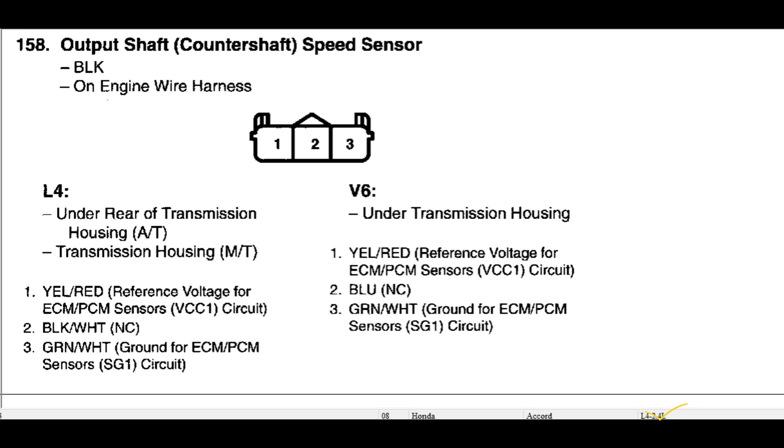2008 Honda Accord with a 2.4 liter, also applies for the V6, same years 2008 to 2012. The color of the wires are a little different for the V6 and the 2.4 liter. I'm going to be troubleshooting a 2.4 liter that has this code.

P0717, a problem in the input shaft, main shaft, speed sensor circuit, no signal. You have to read this carefully. I'm not going to be reading too much, I'm going to be providing some very brief explanation.

This is the code I have here, and basically what you're going to be doing first is jump this line, SCS. Now I gotta say something, this is personal. I have never jumped this line and I have never had any problem before. The idea of jumping this line is to be safe and not damage the computer before disconnecting any other connectors of the PCM.

Personally, I haven't done it, and I have done so many jobs in Hondas. So far I have not damaged anything, but I'm not saying you to do it that way. Please jump it, because that's what Honda says.

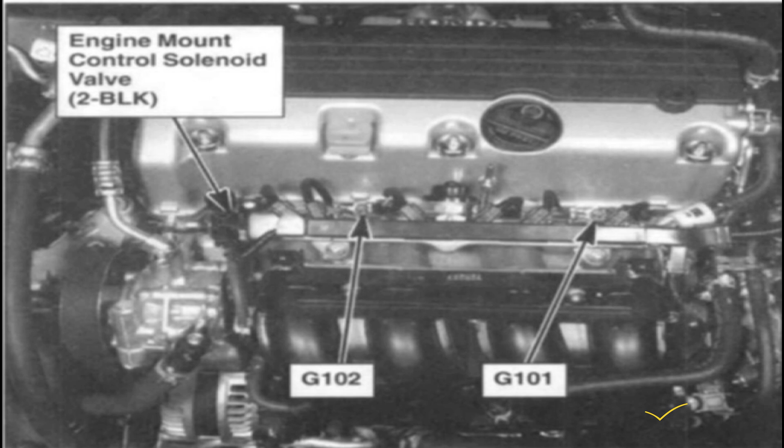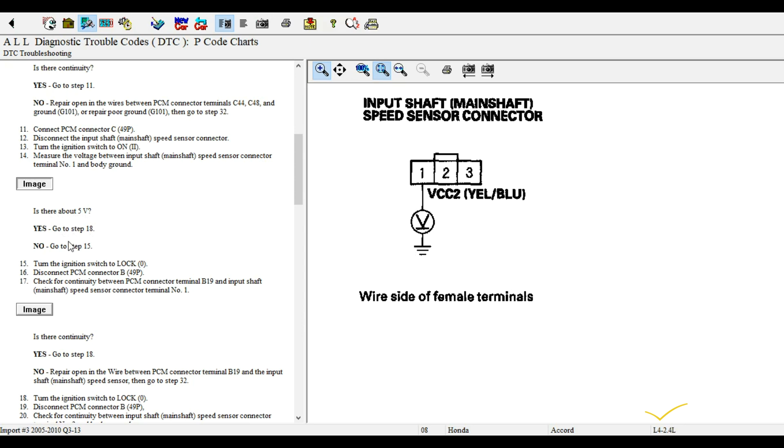You're supposed to get about 5 volts here. Is there about 5 volts? If yes, go to step 18. If not, go to step 15. It all depends on what you get. It's the same connector on the PCM.

49P. Turn the ignition switch to lock position. Disconnect PCM connector B49. Connector B is this one here, the same 49 connector B.

Check for continuity between PCM connector terminal B19, which is this one here, 19 right there. I wish I could make this bigger, but the software is not allowing me to do it. Sometimes I can make it bigger so you have better visibility. Terminal B19 and input shaft, main shaft speed sensor connector terminal number 1 here.

So you gotta check continuity, and if you find continuity, go to step 18. If not, you have to repair the wires. Disconnect PCM connector B49P again. Check for continuity between input shaft main shaft speed sensor connector terminal 2 and body ground, this one here, terminal 2 and body ground.

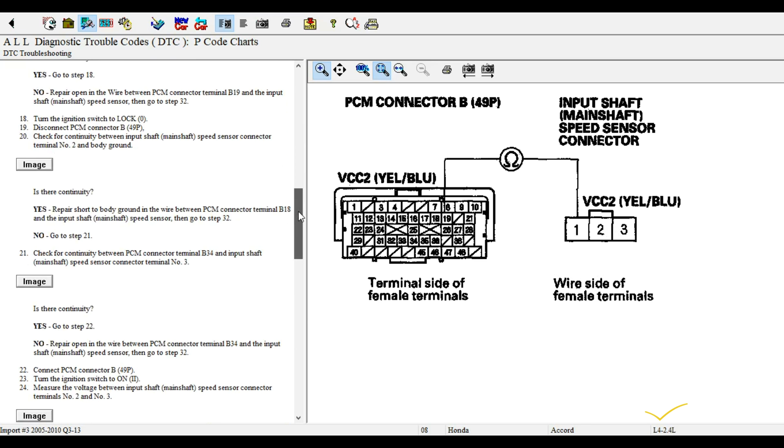That is the next step to do, and here it is. If you have continuity here, then you have to repair the short to body ground in the wire between PCM connector terminal B18 and the input shaft main shaft speed sensor, then go to step 32. If not, go to step 21.

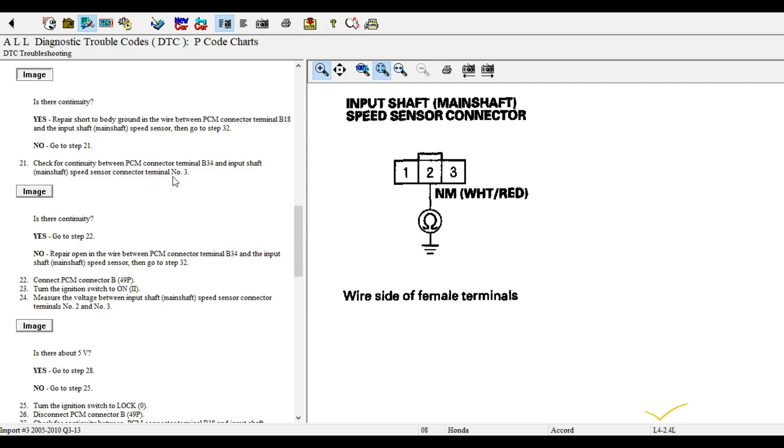Check for continuity between PCM connector terminal B34 and input shaft main shaft speed sensor connector terminal 3, which is this one here. If there's continuity, go to step 22. If not, repair the wire harness between PCM connector terminal B34 and the input shaft main shaft speed sensor, then go to step 32. It depends on what you get.

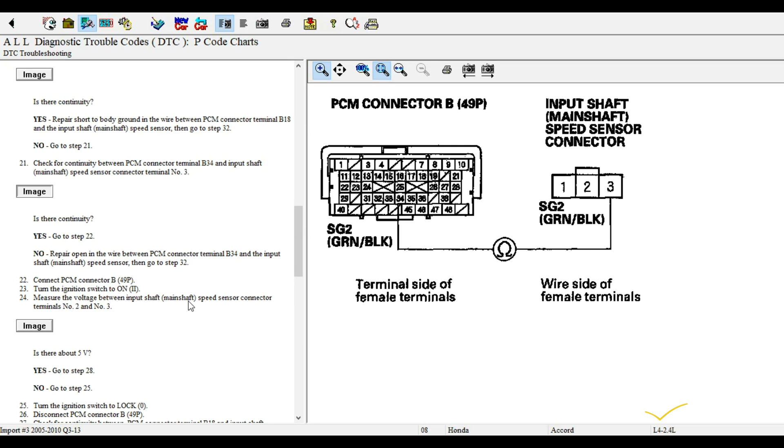Connect the PCM connector B49P again. Turn the ignition switch to on. Measure the voltage between input shaft main shaft speed sensor connector terminal number 2 and number 3. Here is the image again, and also the color of the wires are there, so no way to get lost.

So you have to turn the ignition switch on to do this. Measure the voltage between input shaft main shaft speed sensor connector terminal number 2 and number 3. Is there 5 volts? Supposed to get 5 volts. If you don't get 5 volts, go to step 25, if not to 28. Yes, to 28. Turn the ignition switch to lock.

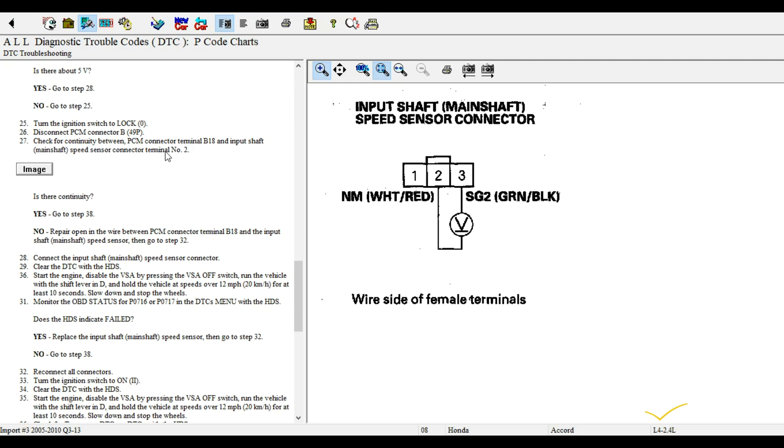Disconnect PCM connector B49P again. Check for continuity between PCM connector terminal B18 and input shaft main shaft speed sensor connector terminal number 2. And here we go again, this is terminal number 2. Let's check for continuity between PCM connector terminal B18, which is this one here, 18, and input shaft main shaft speed sensor connector terminal number 2.

Is there continuity? Yes, go to step 38. If no, repair the open circuit in the wire. So read all of this again, and it depends on what you get from here. Replace the input shaft main shaft speed sensor, then go to step 32. It depends on what you get here.

Always, as I'm saying, always read the instructions. Reconnect all connectors. Turn the ignition switch to on. Clear the code. Start the engine. Disable the VSA by pressing the VSA off switch. Run the vehicle with the shift lever in D or drive and hold the vehicle at speed over 12 miles per hour, 20 kilometers per hour, for up to at least 10 seconds.